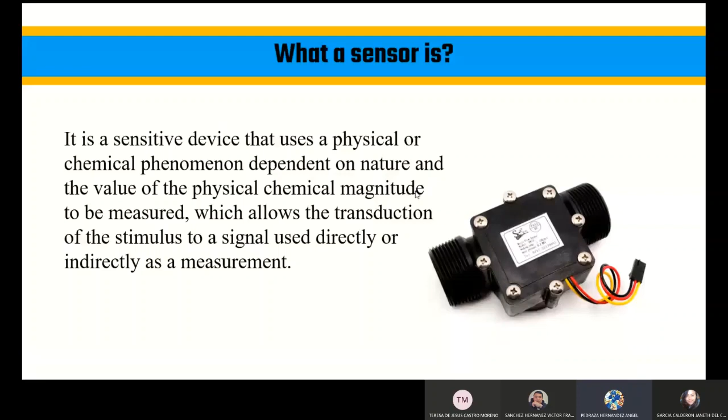My name is Victor Sanchez, and I'm going to explain what a flow sensor is. The flow sensor, also known as flow detector or flow switch, is equipment for monitoring fluids in pipes. It works with the displacement of a magnetic piston that indicates the increase or decrease of liquid flow, activating the contact or reed switch.

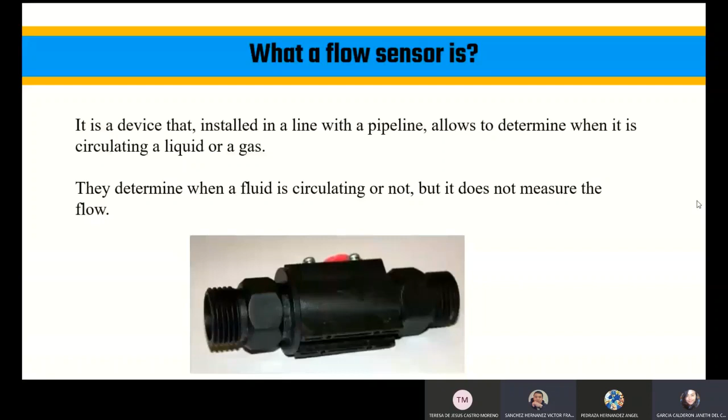What is a flow sensor? The flow sensor is used with liquid or gaseous fluids and is used in almost all areas of process and plant technology. For example, for the supply of coolants or lubricants to machines and equipment, or for the ventilation and extraction of air from installations and buildings. Electronic flow sensors are used to prevent damage or downtime due to flow interruption.

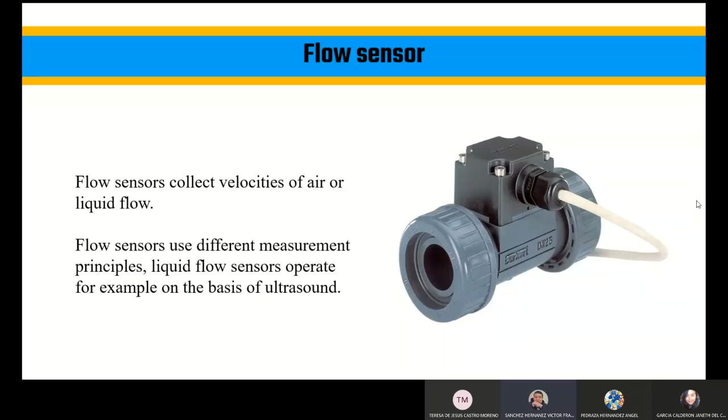We have different flow sensors with different measurement methods for monitoring multiple fluids, for example water, oils, coolants, etc. But also air, compressed air, or aggressive fluids. Its field of application ranges from simple monitoring functions to precise determination of flow quantities.

The piston sensor flow is the most common type of flow sensor. This type is recommended when it's required to detect flow rates between 0.5 LPM and 20 LPM. It consists of a piston that changes position, pushed by the circulating flow. The piston can return to its initial position by gravity or by means of a spring.

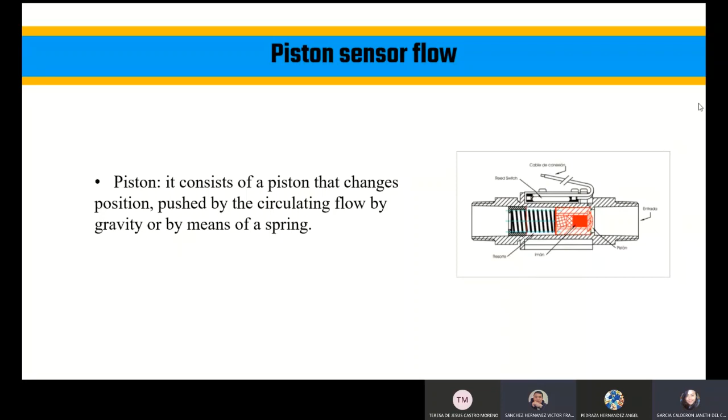Hello, my name is Janeth, and I'm going to present the paddle sensor flow. The paddle sensor flow is a mechanism that uses a paddle connected to the sensor, as we can see here. The size of the paddle will depend on the size of the flow that we are going to detect.

These sensors are used when we have a flow above 20 liters per minute. The function of the sensor will be used in the flow. We introduce the sensor into the flow we are going to detect, and the sensor is going to push the paddle when the fluid crosses it. The mechanism in the sensor will turn on a button or indicator that shows us that the flow is crossing the mechanism.

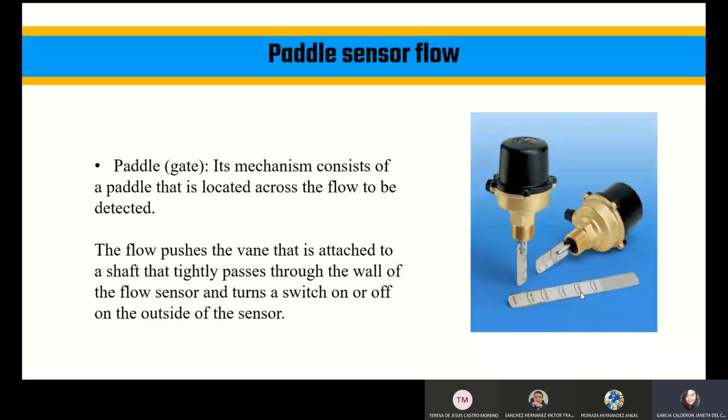Another sensor we have is the lifting flow sensor. This sensor has almost the same mechanism as the paddle sensor, but at the same time is a little different. In this case, the sensor has a plug that stops the flow to let us know the flow is crossing the sensor. But when the flow is stopped, the plug of the sensor changes orientation and closes the flow, which starts to turn on the button connected to the sensor.

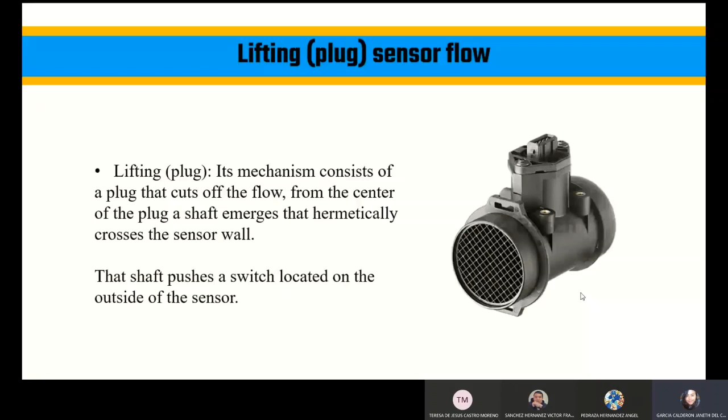Another thing is that these are the most commercial flow sensors actually in use.

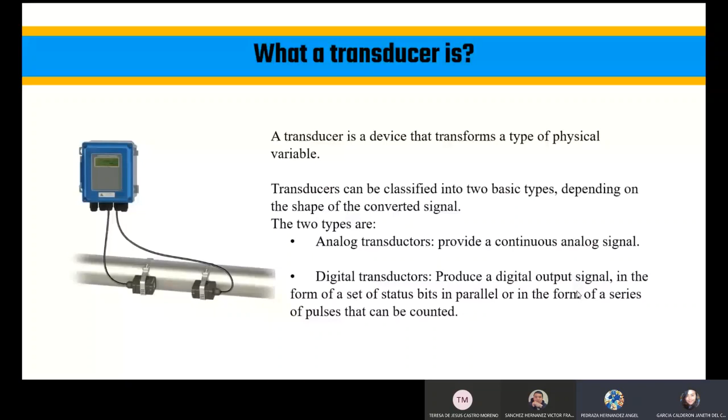A transducer is a device that converts energy from one form to another. Usually, a transducer converts a signal in one form of energy to a signal in another. There are two types of transducers: analog transducers provide a continuous analog signal, and digital transducers produce a digital output signal in the form of a set of status bits, in parallel or in another form.

I'm Teresa Castro, and I'm going to present the flow transducer. Flow transducers are used to measure air and liquid flow velocity, and can also calculate the flow level or determine the amount of flow with a counter. Flow transducers use a manometric method which allows use for a wide range of temperatures and flows.

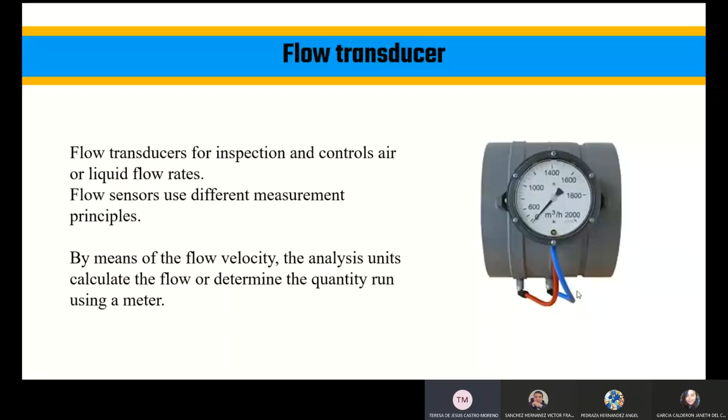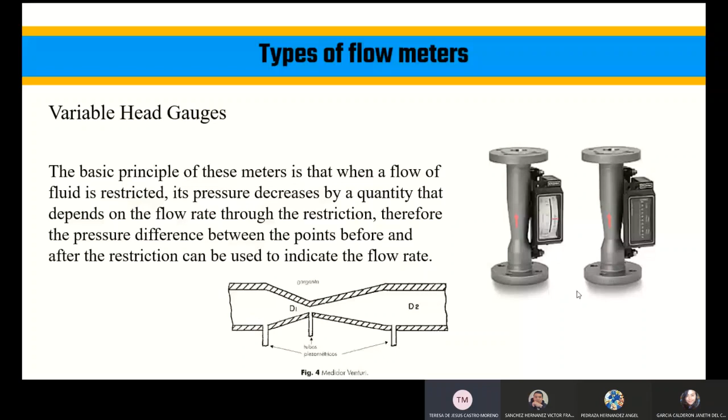A variable head meter has a constant area of the orifice or constriction. The pressure drop is dependent on the flow rate, where the area of the constriction and orifice is constant. On the other hand, in variable head meters, the drop in pressure is dependent on the rate of flow.

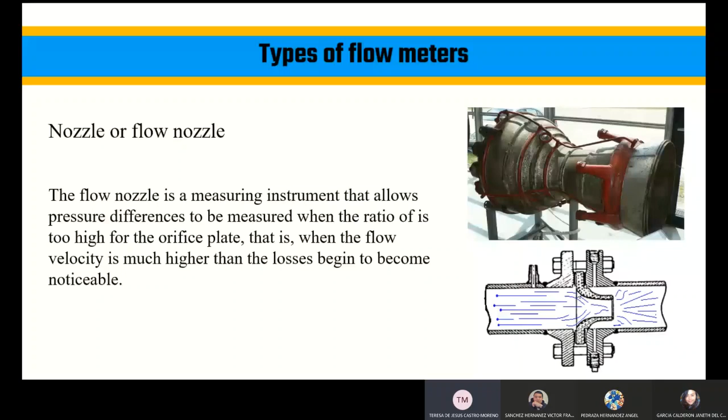The flow nozzle is often a pipe or tube, and it can be used to direct or modify the flow of a fluid like a liquid or gas. The nozzle is frequently used to control the rate of flow, the speed, the direction, the mass, the shape, and also the pressure. When they increase the velocity, the pressure decreases.

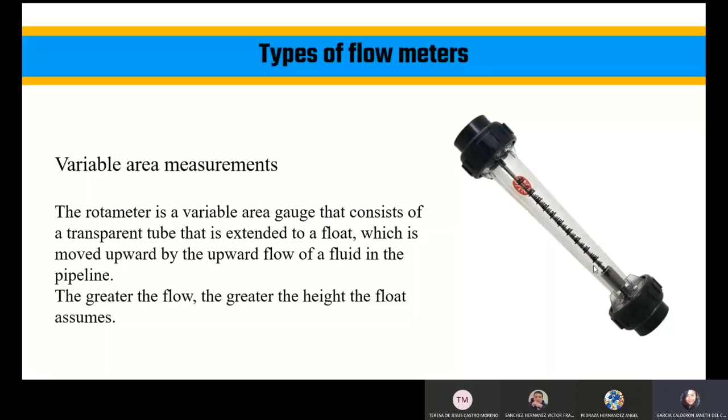Vortex flowmeter. A flow sensor operates to sense pressure variation due to the vortex shedding of a fluid in a passage, and to convert the pressure variation to a flow sensor signal in the form of an electrical signal. An obstruction placed in the flow stream causes the creation of vortices, and a sensor in the flowmeter detects the vortices and generates an indication in the reading of the measuring device.